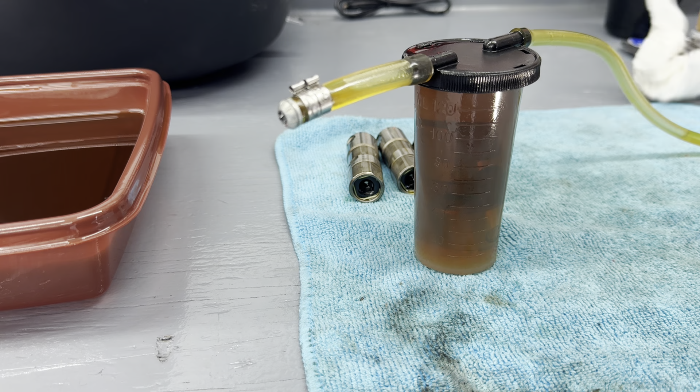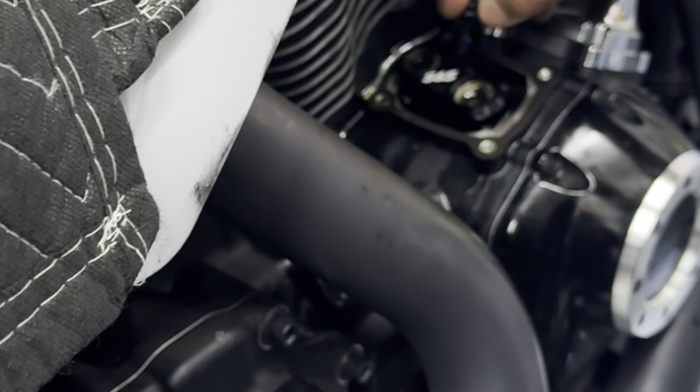Okay, on the white 2020, he's getting the lifters as well. It's time for a lifter change, so we're going to do our normal vacuum setup for these to put oil in the lifters. And as you can see, there's air coming out of them. This just saves a little bit of time. Oh, that's brilliant. All right, we're going back in with the S&S lifter cuffs and brand new lifters, blue Loctite. So we'll continue on.

Okay, same thing now for the front cylinder. He's got the push rod tubes pulled. Those are S&S Quickees, so we didn't have to cut these, and they'll go back in and readjust out.

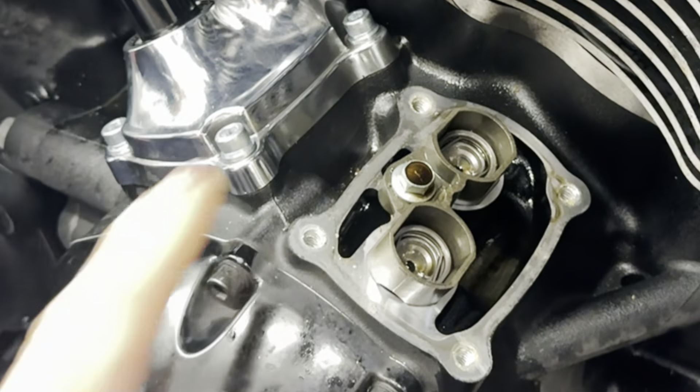Stop what you're doing and listen. All right, for you guys that are doing this at home, these bolts right here are known to break. What you need to do is spray some penetrating lube in there and work that bolt a quarter turn at a time, back and forth, until you can step it another quarter turn. If you break that bolt, that's the crankcase. Take your time. Do not get in a hurry.

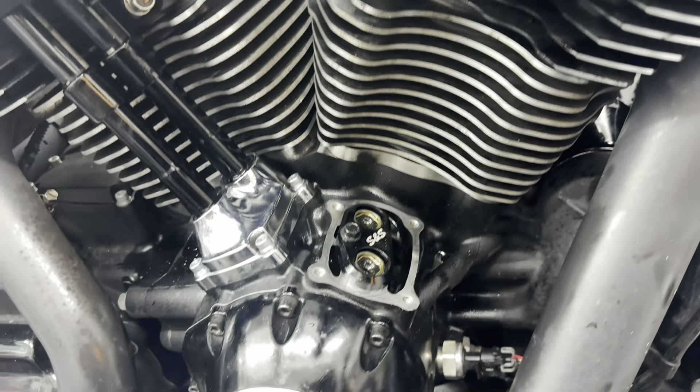All right, the front lifter cuff is in. Next will be the front push rods. Like I said, be careful with these bolts. The S&S kit comes with a new bolt for the cuff. It also comes with 4 new outer bolts and a gasket kit for front and rear.

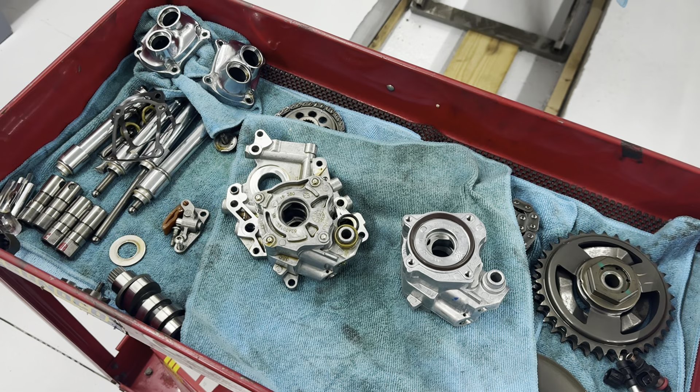So there you go. Okay, in the previous video we spoke about the original oil pump not being the updated oil pump. I'll do a side-by-side comparison. Now this is the cam plate, so it's separate from the oil pump. But as you can see, the factory updated the oil pump with a sealing ring right here. They didn't have a sealing ring the first couple years. I think it was 17, 18, 19.

I believe that's right. And I think in 20 they came out with this version of the oil pump because they were having sumping problems and everything else. Engines letting go and everything else. But anyway, if you got a 17, 18, or 19 M8, you probably have this oil pump in it. And if your bike's been doing fine, you're probably going to be okay.

But if you do any kind of work inside the cam chest, just grab a new oil pump and put it in there. The labor's crossover labor if somebody's already in there doing work. So you're not specifically changing out the oil pump, so you can cross over some labor.

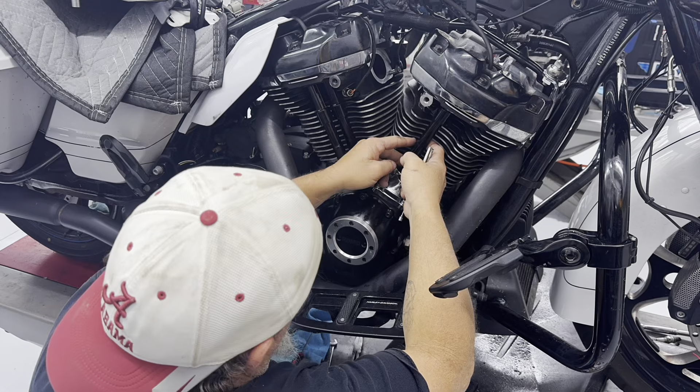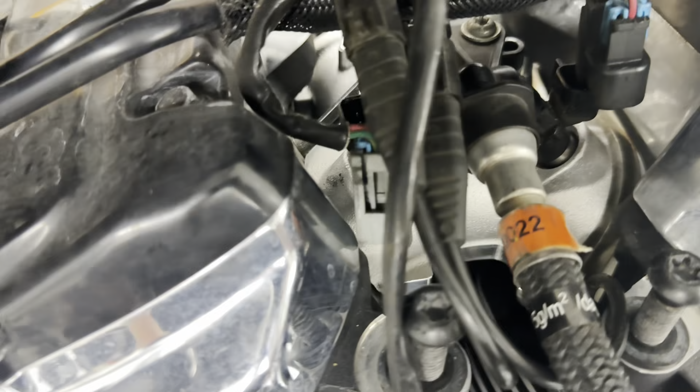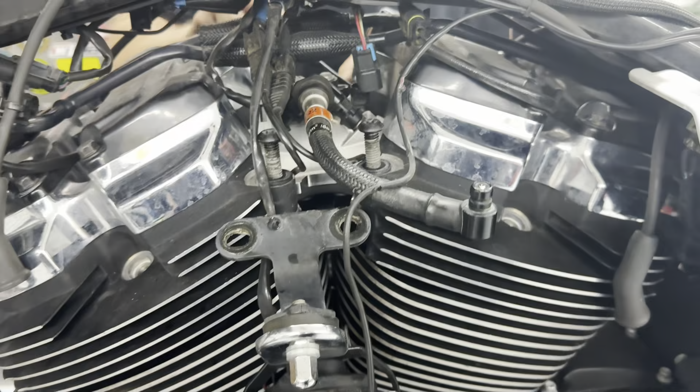And the S&S aluminum intake manifold is now reinstalled along with the, yes, reunited, and feels so good. So we reused his 7.3 injectors. We're going to go ahead and bolt everything back together on this one, and I'll get into the ThunderMax part of it here in just a few minutes.

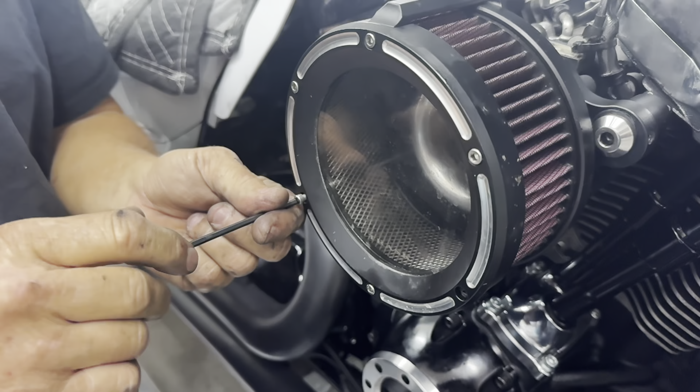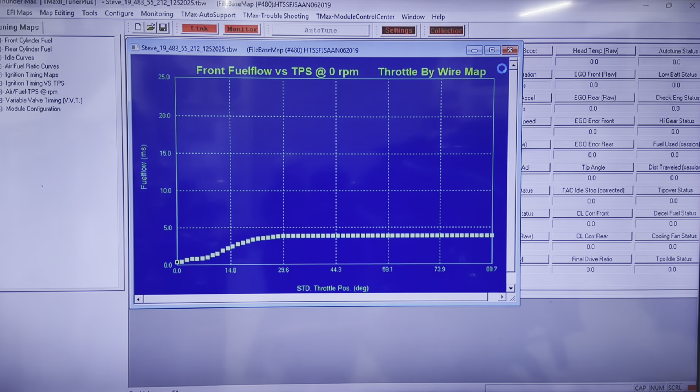And now for something completely different. All right, we're going to pull the map out of this white 2020 today and see where we go with it. And I'm gonna go ahead and pull up the ThunderMax software here, and let's see what we find. Okay. So as usual, you want to get rid of anything that's on there. We're going to not do this. I've already done it.

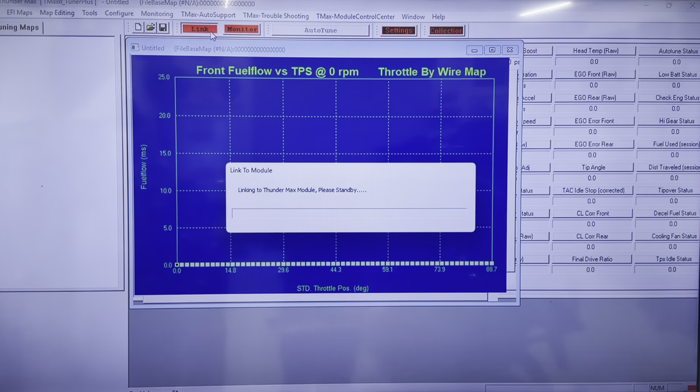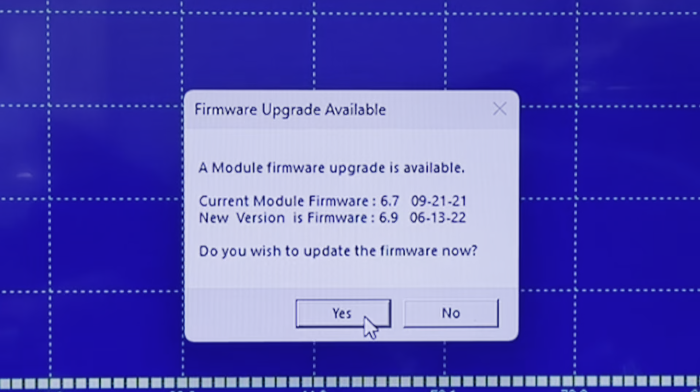Okay. All right. So we want to go ahead and link. So it's reading from the bike. And it needs new firmware too. How about that? So let's go ahead and do that. I'm not going to bore you with this. So I'll go ahead and do this, and then I'll get back with you here in just a few minutes. It's finishing up right now, and we'll move forward. All right, firmware update has completed.

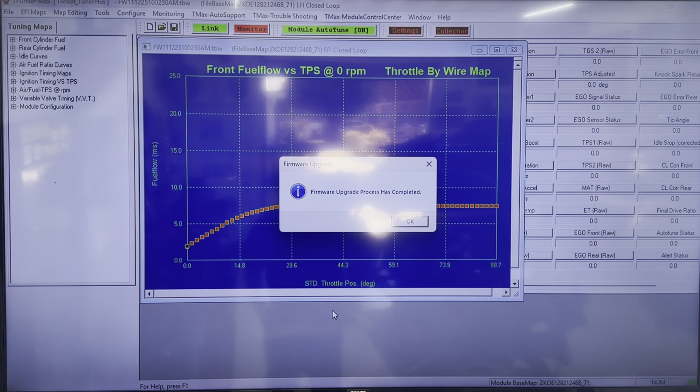Okay, so just to be safe, I'm going to turn the power off and wait for the link light to go out, and then turn the power back on. Then I'm going to reread the map, and I'm going to pretty much erase anything that this bike has learned over its lifetime. We're going to start over. We're going to keep the original map.

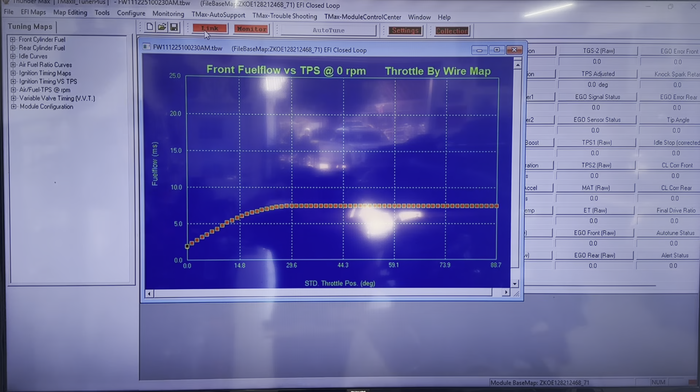At the top you can see the ZK OE 128-212-468_71. That map was provided to me by Dan at Zippers, so it's a good map. Read module, maps and settings, just to be sure. All right, let's go to clear learned fuel adjustments, and let's see what happens. Yes.

Current displayed map has been reset. Okay, now just to be sure, let's go up here and look and see if there's been any adjustments made. No. Let's go to air. Okay, yeah, that ain't what I want to do.

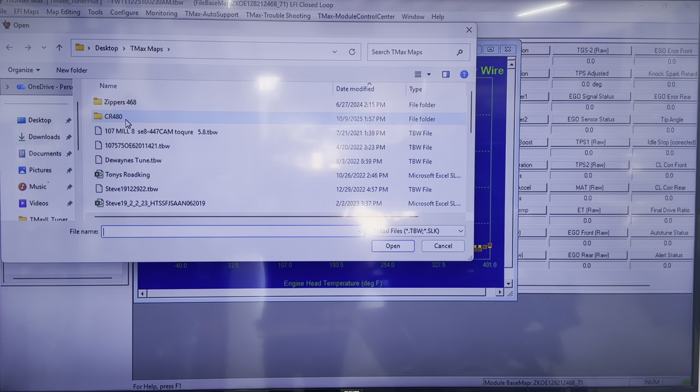Let's open it. And let's write map editing. Let's write that. Yes. So we're going to literally start from scratch with the same map. Okay, now let's kill the power on it 3 times.

You don't have to do this when you're getting on it to ride it. All we're doing here is waiting for a connection to the computer. That's all we're doing. It has nothing to do with cranking it and turning it on and cranking it and riding it. So don't get it confused.

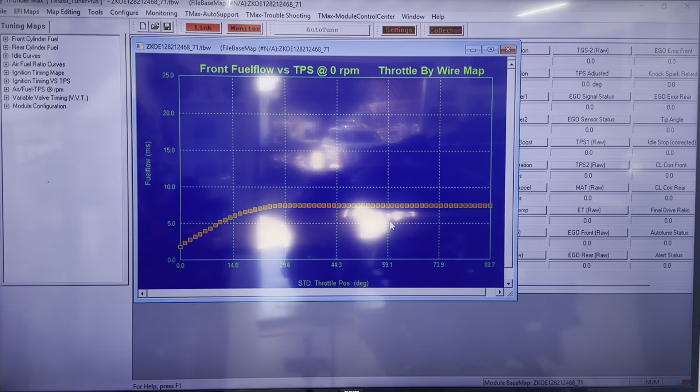Okay, we got green, let's turn it off. This will be our second cycle. Okay, turn it back on. We can go with that. That'll be our third cycle.

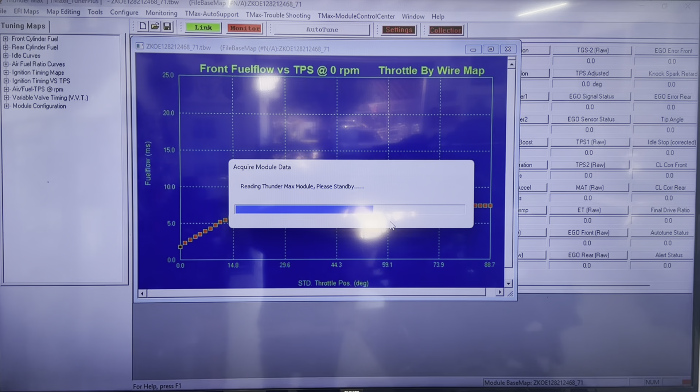All right, so what I want to do now is once that links up, I want to go in here and make sure there's been no leftovers from the other map. I don't think there will be, but let's go to here. Yeah, see, that's nice and fresh.

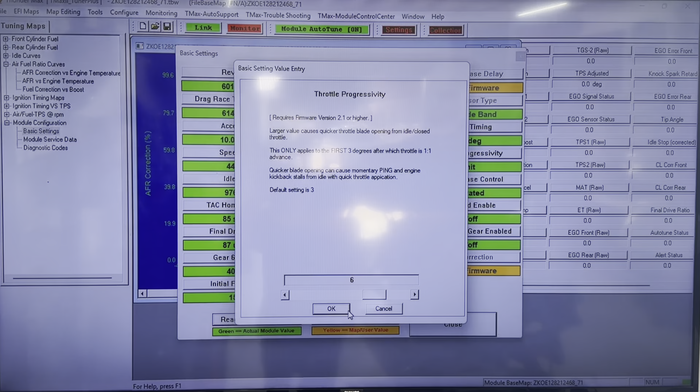All right, so let's make sure that we have basic settings, 44,750. Let's go here, make that throttle progressivity 6. I like using 6. And let's set the rev limiter at 6,000. Let's leave that alone. All right.

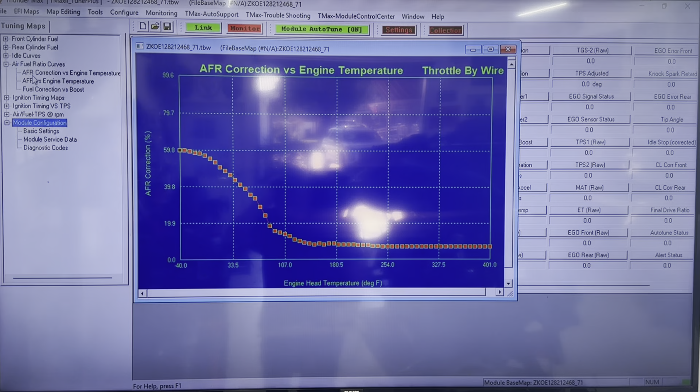And let's go here, we're going to monitor it, and we're going to fire it up and see. Fire it up and do our first idle tune. So here goes.

All right, what we're going to do here—I know the microphone situation is not good, guys. I need to spend some money on some microphones, but I haven't, so bear with me on that. But what I'm doing now is making sure that we have no intake manifold leaks.

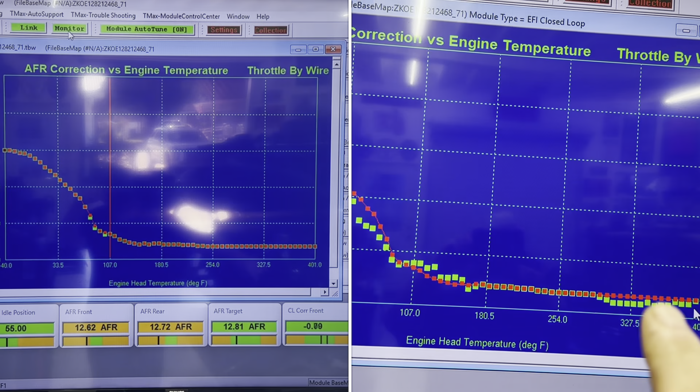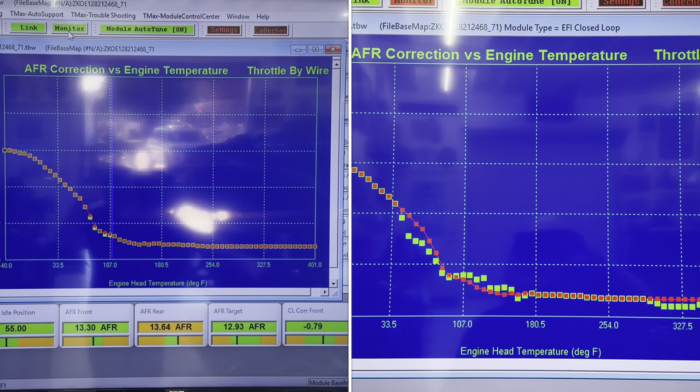So we're going to let this thing go and see if it stays pretty good with the base map. Do you remember when I showed you this map earlier, how it was tuning at the far extreme of its limits because of temperature? You don't see that now because this is a brand new map. So we're going to be doing some riding on this thing and make sure, and I'll show you the difference between a good sealed intake manifold and one that leaks, like basically is not even sealed at all, pretty much.

So hang in there, I'll be back with you in just a minute.

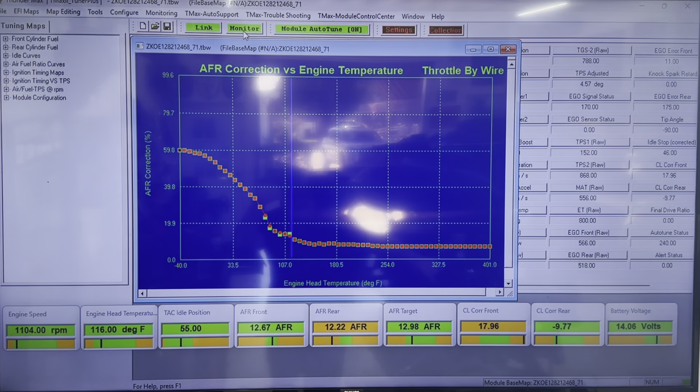Okay, you can see it's making changes from the base map. That's not a problem, it's because the bike is an individual. But at least it's going along in a good continuous manner there. So it's just adjusting for the individual bike. This is not a bad situation. It's good. It's good, actually.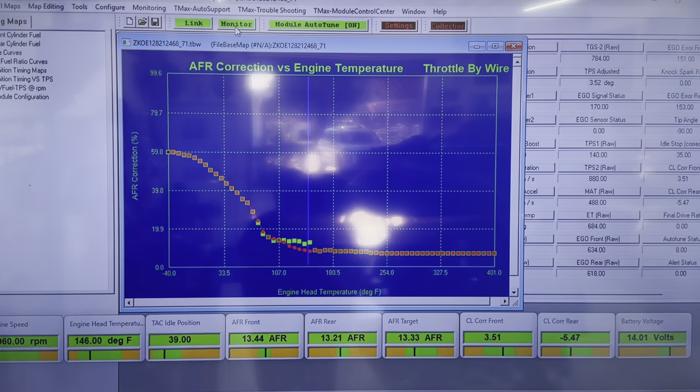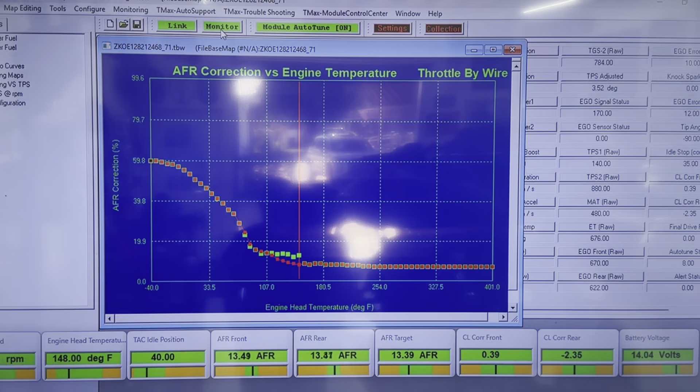Everything is within tolerance. If you look down around each of the gauges at the bottom, everything's sitting in the green. You can't ask for anything better than that. So right now everything is right where we want it to be.

All right, we're still going along just fine. Remember, we go to 180 degrees and shut it off. That's the limit to the idle tune, temperature-wise. Once it gets past that, it's tuning in different areas, and it will show, but not during the idle tune.

All right, we're approaching 180 degrees, and again, everything's going along just like I would expect it to. This is going to turn out really good.

The AFR front and rear, as you see them dancing around, if it bounces out a little bit, that's not a problem. We want it to be in the green 95, 96, 97% of the time. Anything north of that is really, really good, but you rarely see it.

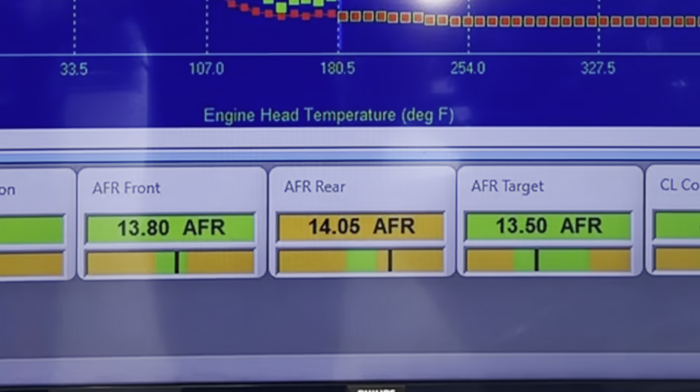Like right now where the AFR is bouncing out on the rear, it just crossed over a threshold of 180, so some of the parameters changed inside the ThunderMax, but if you sit here and watch it, it's going to crawl back over into the correct area.

There you go. Okay, we're going to shut it down and wait for it to disconnect, then reconnect it and do an auto map. That means we're going to seal in - that's my term - what it's learned, and then we're going to let the bike cool back down to somewhere south of 80 degrees and do another idle tune. See if we can't get it really, really tightened up.

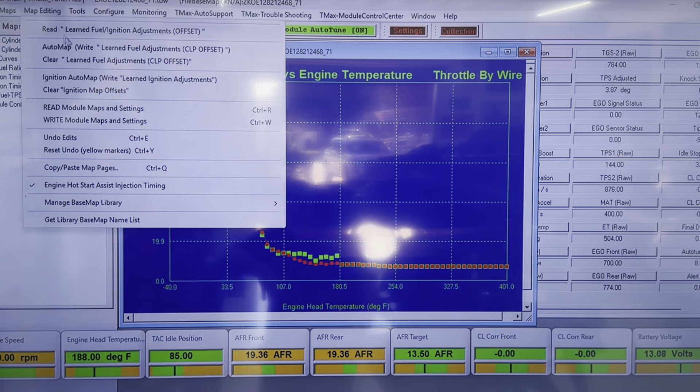All right, so we're going to go right here, map editing, auto map. Okay, the auto map has completed, and as you can see, the red now moved. The yellow is where it was, and the red is the new map. That's how we know what we got.

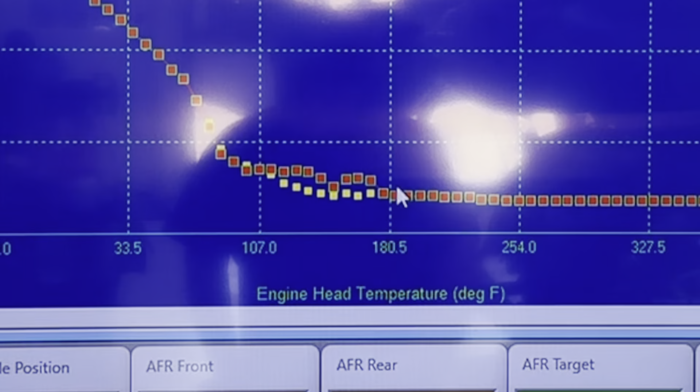So we're going to let it cool down, and I'll be back with you in probably half an hour or so, but not for you. For you, it'll be like 0.2 seconds, but time-wise, it'll be about a half an hour.

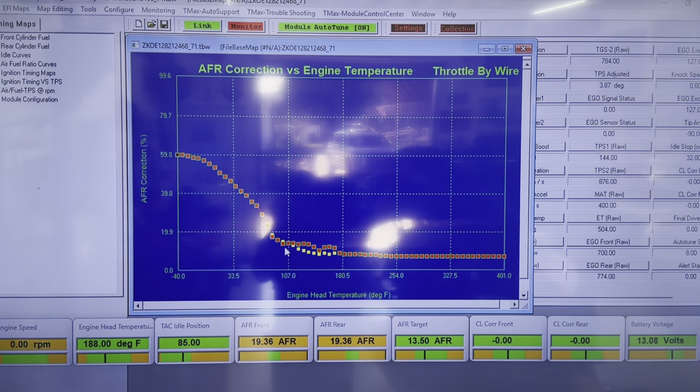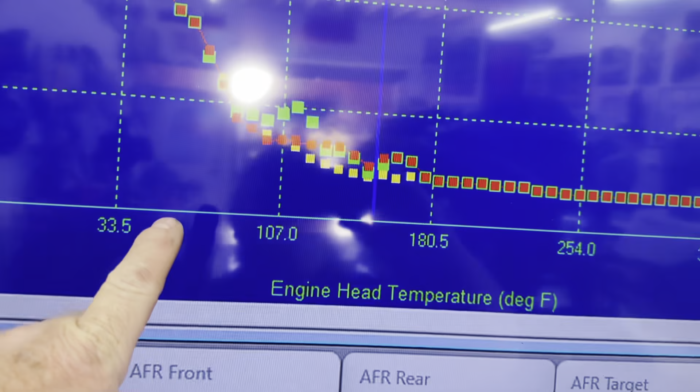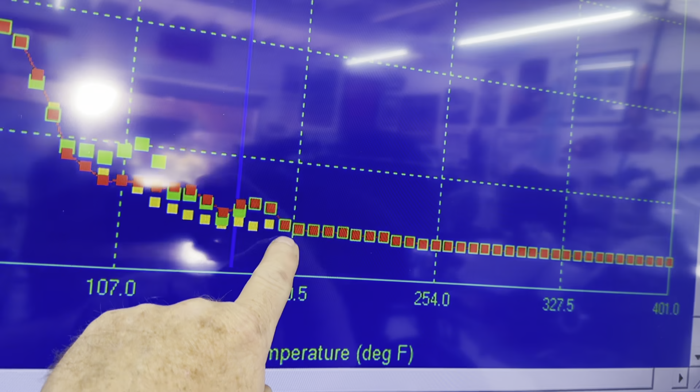One eternity later. Okay, this is the second idle tune. Again, all of our gauges are right where they want to be. It did make some further changes here, from like 80 degrees to like 110, 115, and then it went back to normal. It's kind of fine-tuning here between 180 and like 130. So we're okay, we're doing good.

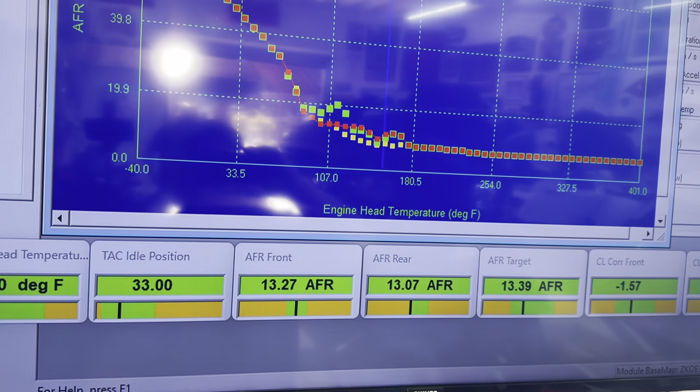And we'll go ahead and let this one finish out, and we'll do a third. After it cools down, we'll do a third.

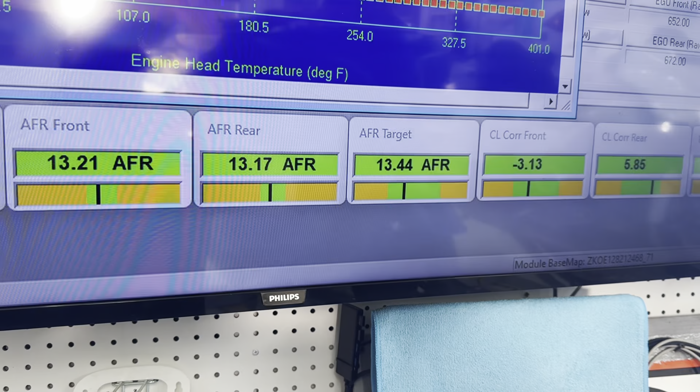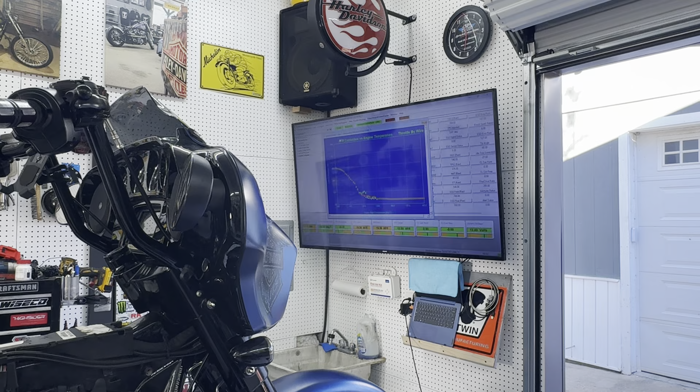Okay, we've reached 180 degrees on the second idle tune. We're going to go ahead and shut this thing off. All right, we're going to wait for it to disconnect, and then we'll go ahead and do an auto tune.

I'll go over what changes it's made here with you so you can see the little bit of adjustment that it made on the second auto tune. All right, so here's what we got.

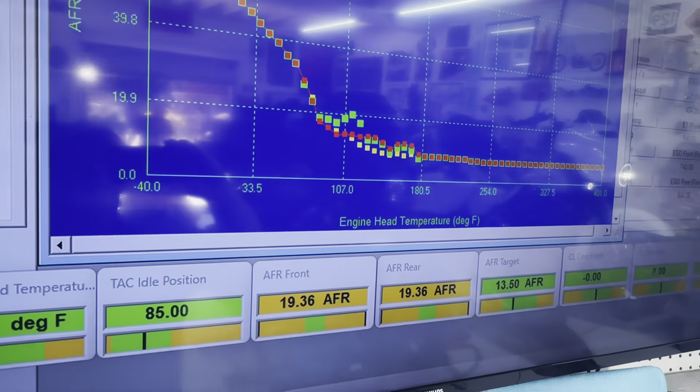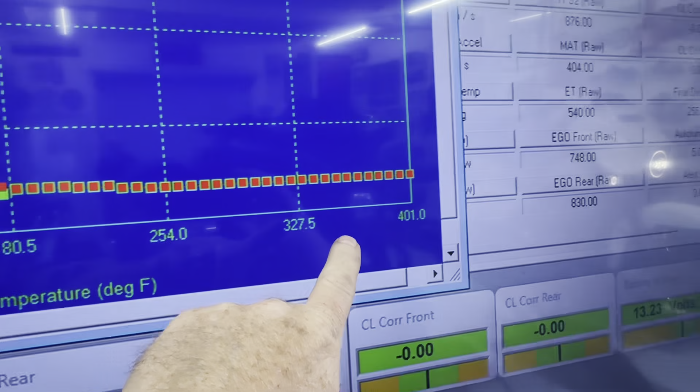This is your temperature range, -40 to 401 degrees. So this is basically warm up. It was about 60 degrees here, I believe, when it cooled down.

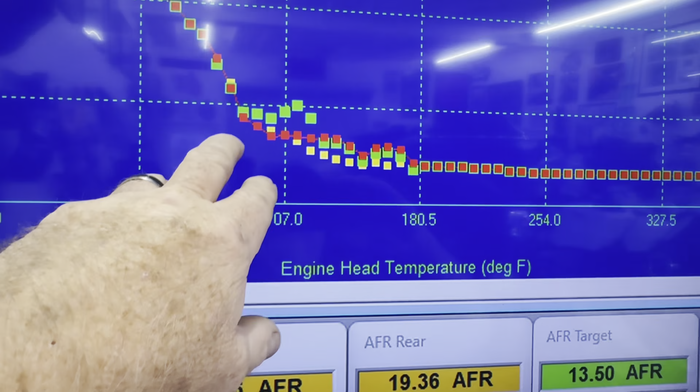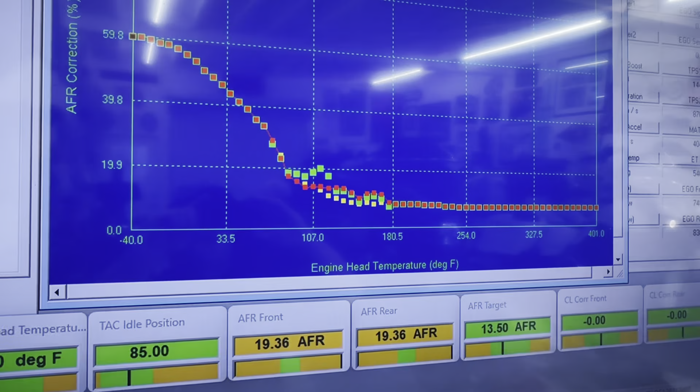So in this area here, it made pretty good adjustments. Like I say, this is the individual bike, but down here it kind of went backwards a little bit, straightened itself out. So we're going to go ahead and do an auto map and let it cool down and then do a third idle tune and see what happens.

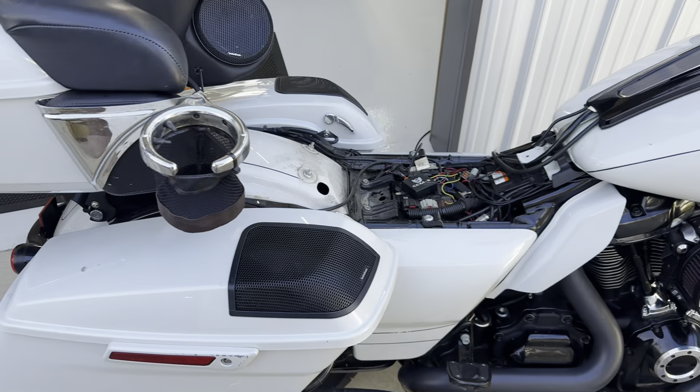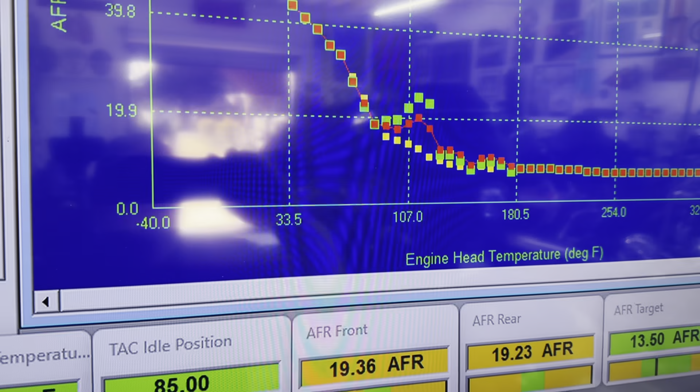Okay, we've reached 180 degrees on this third run up, third idle tune. Let's go in here and see what we got going on. So still a little bit of adjustment down in low temperatures, and it's bringing things back to where they were a little bit, between like 120 and 180.

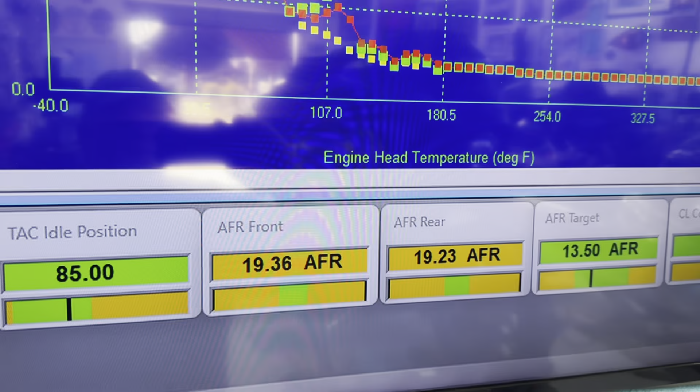All good. So we're going to go ahead and auto tune this one - or excuse me, auto map it - to save all this information it's learned. And we're going to go test ride it and check for timing and things like that.